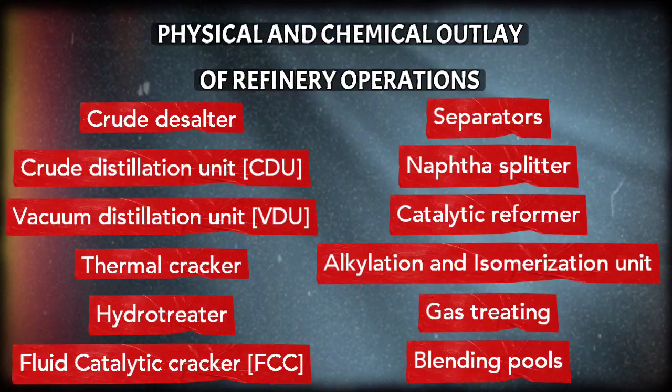Now we'll be looking at the physical and chemical outlay of refinery operations, and in the physical outlay, we'll be looking at some of the various unit operations carried out in a petroleum industry. So one of the physical outlays is the use of a desalter. Usually there is salt content in crude oil, and it varies depending on the source of the crude oil. Desalting is carried out to remove impurities, especially salts and water, from the crude oil prior to distillation.

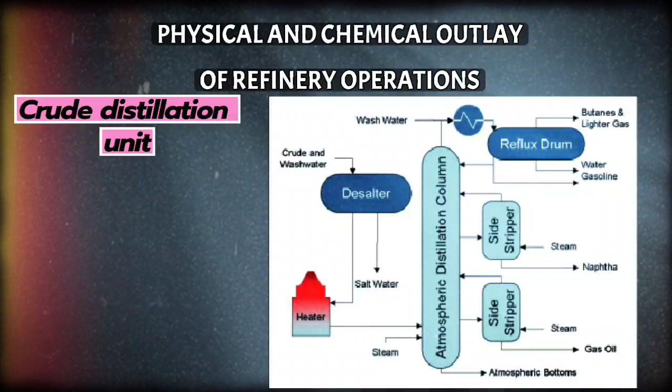Now we have the crude distillation unit, which comprises an atmospheric distillation column, side strippers, and a heat exchanger network. It also has a field desalter and a furnace as main technologies, which enable the separation of crude into various products or fractions. The atmospheric distillation units in the crude distillation units operate at atmospheric pressure and higher temperatures to separate lighter fractions like gasoline and diesel.

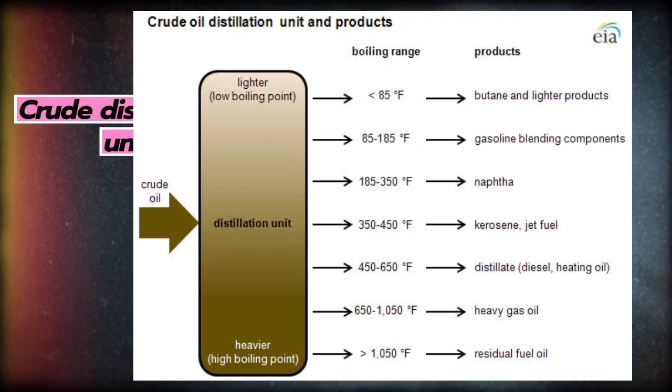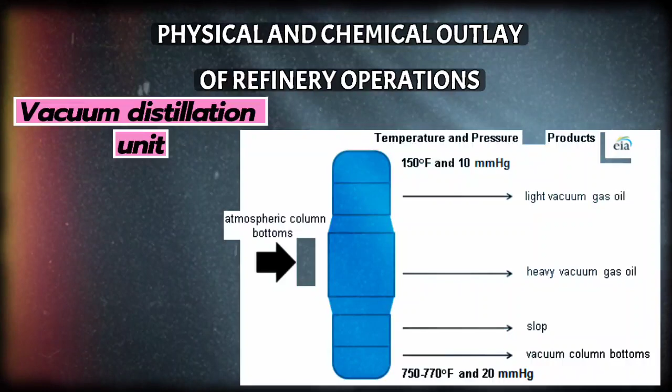Now we have the vacuum distillation unit, another physical outlay. The VDU, the vacuum distillation unit, operates at reduced pressure and lower temperatures to separate heavier fractions, producing heavier fractions like vacuum gas oil, VGO, and lubricating oil.

Now you have to note that crude oil is separated in a distillation unit, be it the ADU or the VDU, that's atmospheric distillation and vacuum distillation unit, through a process known as fractional distillation, which involves heating crude oil at elevated temperatures in a furnace or heat exchanger. And once the crude oil is heated, vaporization occurs. That is the first thing that happens.

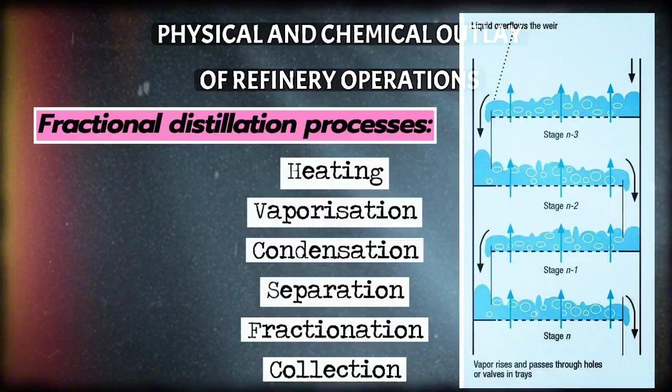Now, when the heated crude oil is fed into the distillation column, it vaporizes. So it has to be heated, then fed into a distillation column or unit where it vaporizes. And then condensation occurs. As the vapor rises, it cools and condenses into a liquid on each tray of the distillation unit. What occurs next is separation. The condensed liquid is then separated from vapor, and the process is repeated on each subsequent tray.

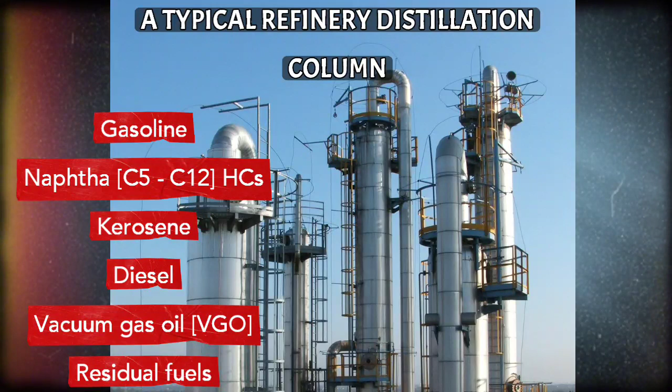What happens next is fractionation. This process occurs due to differences in boiling points. So based on their boiling points, the crude oil fractions are separated into the various collecting trays and sent for further processing. Now, the distillation column essentially yields gasoline, naphtha, which are just hydrocarbons ranging from C5 to C12.

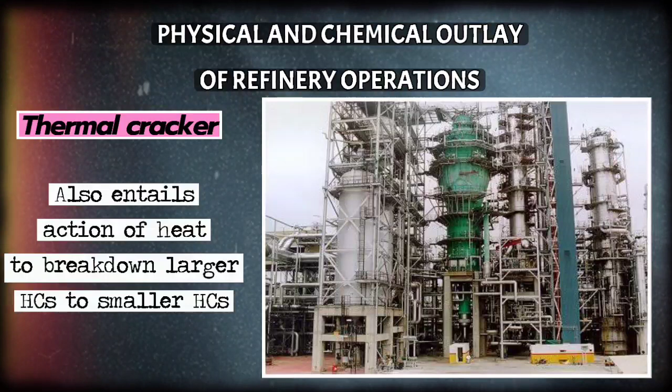Kerosene is there, diesel, VGO, that's the vacuum gas oil, and residual fuels. These are some of the yields from the distillation column. We also have a thermal cracker. The thermal cracker involves a chemical cracking process followed by separation, which takes advantage of their boiling point differences to yield the desired product. Then we have a component which is also a physical outlay called a hydrotreater.

The hydrotreaters are used for sulfur removal, such as thiophene, sulfides, sulfur mercaptans, also for nitrogen removal, where nitrogen is typically transformed into ammonia gas. It's also used for oxygen removal, where oxygen is reacted with hydrogen and eliminated as water. Olefin removal, where the olefins are transformed into stable paraffin hydrocarbons.

And also the hydrotreaters are used for metal removal, where metallic components are removed because they can cause deposits on catalysts and in engines, which could actually lead to knocking or maybe the poisoning of the catalyst. So the metals are actually being removed.

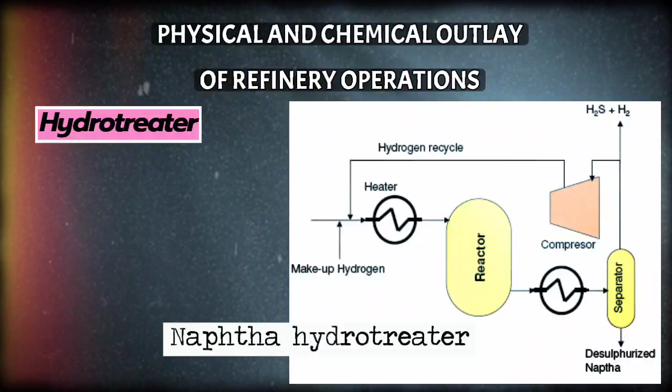Now we have another component called the FCC, which is the fluid catalytic cracker. It converts heavy, high boiling point hydrocarbons to alkene gases, and it breaks large hydrocarbons into smaller molecules through catalytic cracking, producing high octane components of blended gasoline after the removal of sulfur compounds. The removal of sulfur compounds is a function of the hydrotreaters.

So we have the separators. Here the gas fractions from the various units previously need additional separation. It requires stage-wise separation of the gas fractions. So we have the C4, C3, C2 separators of gas fractions to yield desired products.

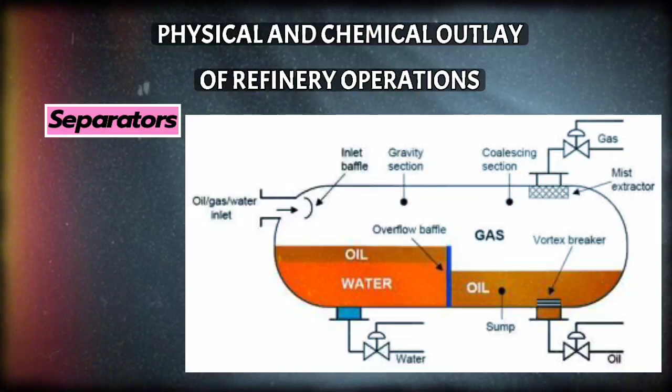Then we have the naphtha splitter. The naphtha splitter consists of a series of distillation columns which enables the successful separation of light naphtha and heavy naphtha from the consolidated naphtha stream obtained from various other units previously.

So we have a catalytic reformer. The catalytic reformer converts low octane naphtha into higher octane reformate products for gasoline blending and aromatic-rich reformate for aromatic production, such as benzene, toluene, we have all those. So that is the work of the catalytic reformer.

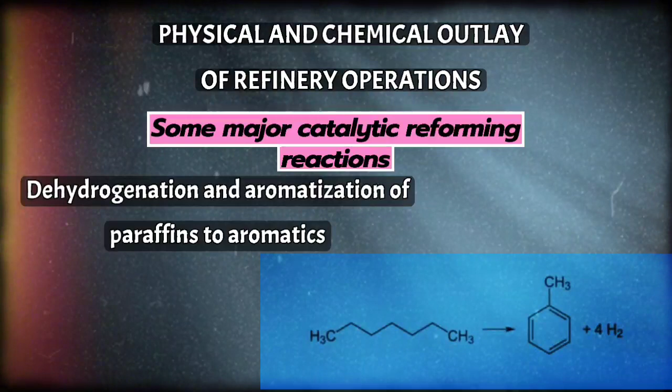Major catalytic reforming reactions in the catalytic reformer: one of which is the dehydrogenation of naphthenes to convert them into aromatics. Then we have the dehydrogenation and aromatization of paraffins to aromatics. And then finally we have the hydrocracking of paraffin into smaller molecules.

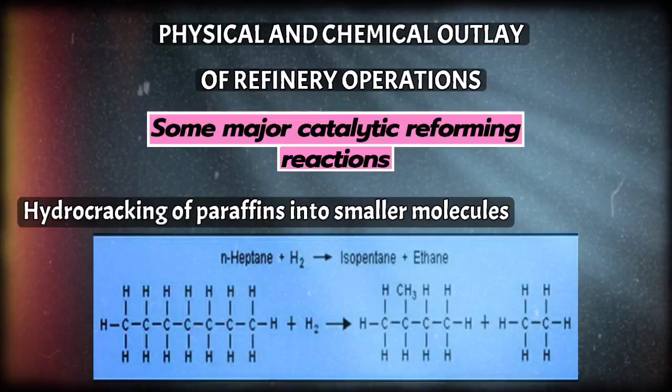Now the octane number is just a measure. We'll be looking at that. So essentially the essence of catalytic reforming is to increase octane number. The octane number is a measure of the performance of an engine or an aviation fuel by measuring the rates of isooctane in the gasoline structure. So essentially the higher the octane number, the more compression the fuel can withstand before detonating or knocking or igniting.

So fuels with higher octane number are used in high performance petrol engines that require higher compression ratios, while fuels with lower octane number mean higher N-heptane rates. So isooctane has an octane number of 100 as a designation, while N-heptane has an octane number of 0.

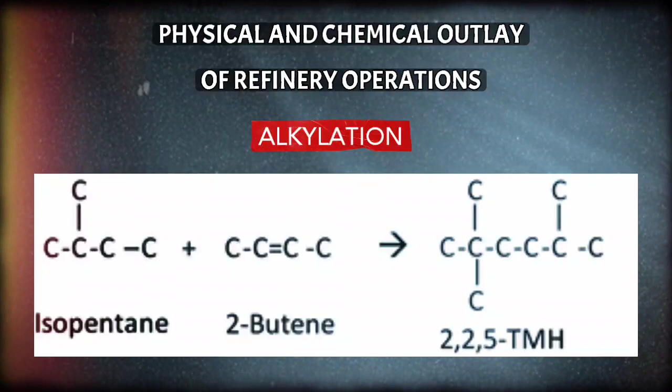So now we also have one of the processes, and the physical outlay where it occurs, which is alkylation and isomerization. Alkylation combines light hydrocarbons to yield high octane components of gasoline. Alkylation has to do with the reaction of olefins and isoparaffins to yield a mixture of heavier hydrocarbons. Now, isomerization essentially converts N-butane to isobutane for use in the alkylation process.

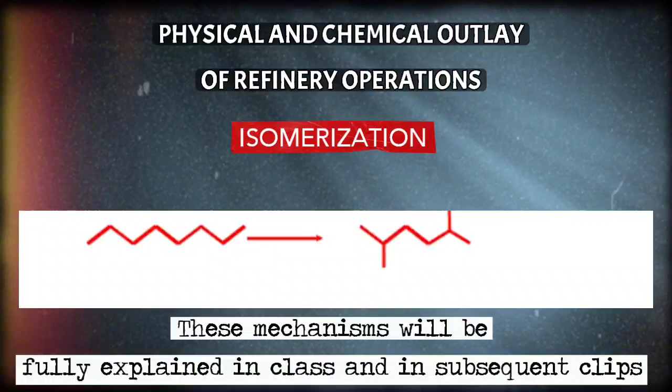Now we also have the desulfurization. Desulfurization processes such as hydrotreating and hydrocracking convert sulfur compounds into hydrogen sulfide, which is then removed and converted into elemental sulfur or sulfuric acid, thereby producing cleaner fuels, because we don't need sulfur in crude oil, though it has one or two major impacts.

It causes air pollution. It tends to corrode equipment and some infrastructure, and it also tends to poison the catalysts that are being employed in refining. Poisoning means to halt or to reduce the efficiency of the catalyst.

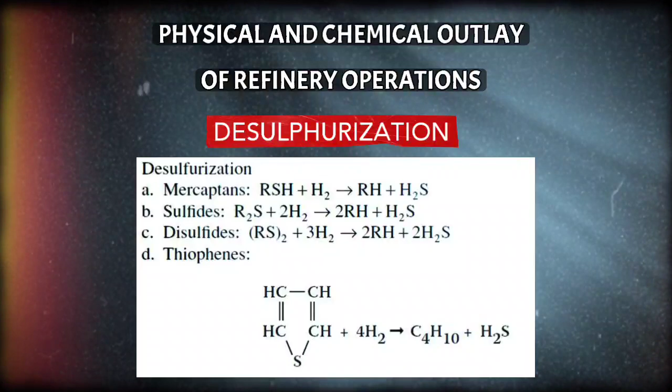And then we have some steam reforming major reactions. First off, there is the pre-reforming, with hydrocarbons such as the C3, C4, and the naphtha. I said earlier, naphtha has to do with the C5 to C12 hydrocarbon range. So these higher hydrocarbons are broken down into methane for more efficient reforming.

That is pre-reforming. Then we have the methane steam reforming, where the methane reacts with steam to produce carbon monoxide and hydrogen gas. And then we have the water gas shift reaction, where the carbon monoxide that has been formed in the methane steam reforming reacts with steam yet again to produce carbon dioxide and additional hydrogen gas.